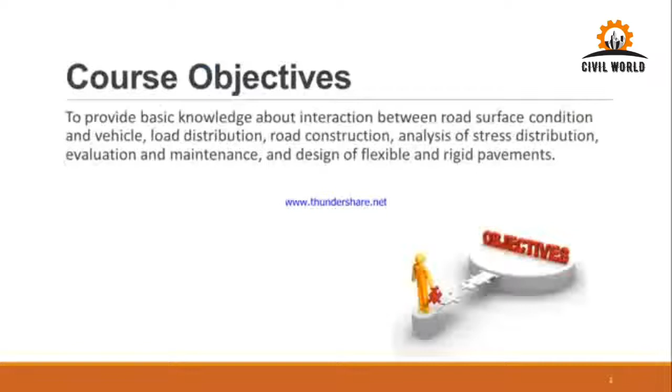These are course objectives: to provide basic knowledge about interaction between road surface condition and vehicle, load distribution, road construction, analysis of stress distribution, evaluation and maintenance, and design of flexible and rigid pavement.

Here in the current subject, first of all, we will focus on the interaction between road surface condition and accident risk, or road surface condition and safety of your vehicle, because the road surface condition is directly linked with the safety of your vehicle. For example, the frictional force or skid resistance on the road surface assures the safety of your vehicle, and the skid resistance on the road surface is the only thing which stabilizes the motion of your car and lets you play with your car during the journey.

For example, you might have observed that when there is oil content or mud or ice on the road surface, there is no skid resistance, because the frictional force or skid resistance is produced due to the friction between the tire and road surface. When the tire and road come in contact with each other, the friction becomes the source of frictional force, and the frictional force stabilizes the motion of your car and enables you even to play with your car during motion.

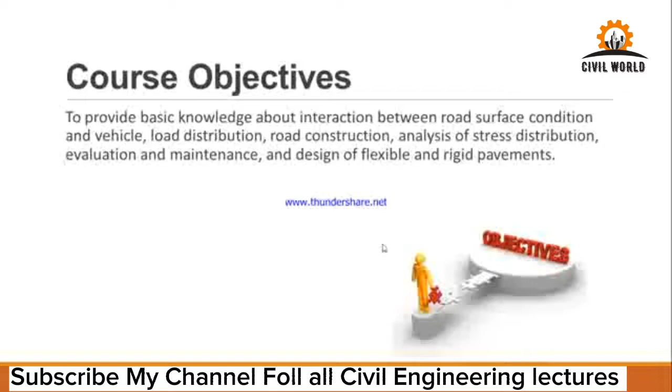And I have told the students that attention and presence are very essential in order to learn the current subject and then put this knowledge into meaningful actions for the betterment of society. So hopefully all of you will be present and on time during the mid session.

So in today's topic we are planning to study road intersections. An intersection, also commonly known as a crossroad, is any place where two or more roads intersect or meet each other. It may be at the same grade or a different grade, I mean at the same height or a different height. An intersection may be signalized or non-signalized, and may or may not have a roundabout.

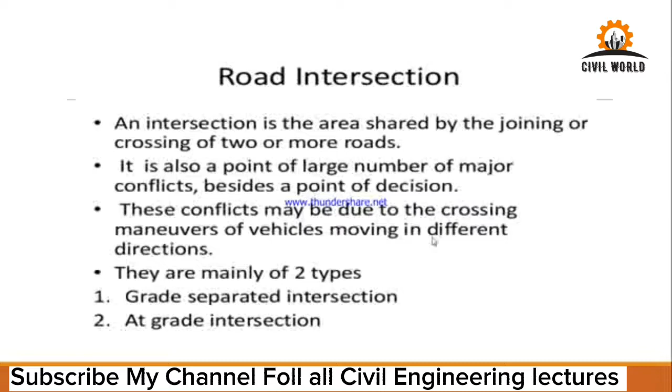These are basically intersections where the two roads meet at a different grade, or where the two roads cross each other at different grades, and usually some small roads called ramps are provided at the side, connecting both the facilities, in order to transfer traffic from one facility to another facility.

An at-grade intersection is a junction where two or more roads or streets meet or cross at the same level. They are classified as unchannelized intersection, channelized intersection and rotary intersection. So first of all, we will talk about the unchannelized intersection.

So first of all, I'll talk about channelized intersection. These are those intersections where the vehicles approaching the intersection are directed to definite paths by islands, markings, etc. And this method of control is called channelization. But if no channelization is provided, the driver will have less tendency to reduce the speed while entering the intersection from the carriageway.

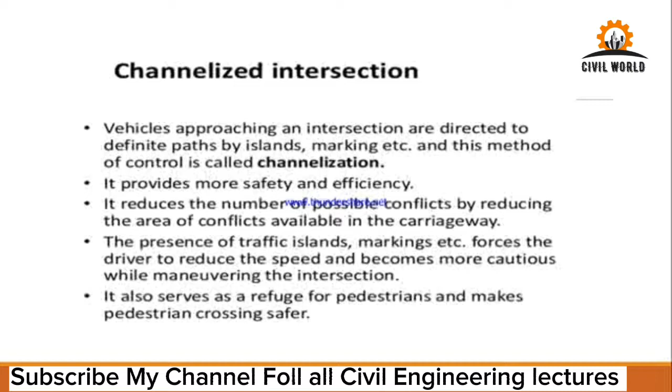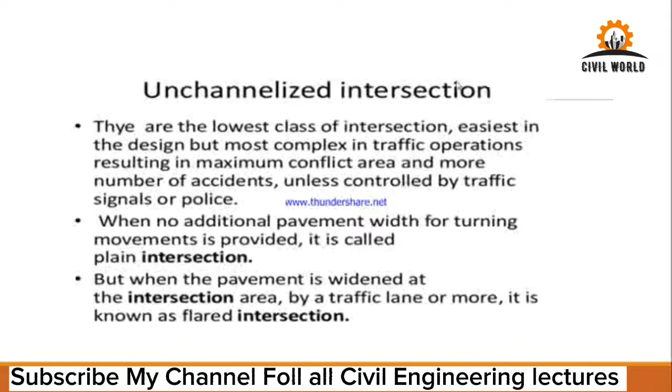The driver basically violates the law and thus tries to use any part of the intersection, and sometimes this habit may become a major cause of accidents, and that's why these unchannelized intersections are the main sources of traffic accidents. Channelized intersections are much better compared to unchannelized intersections to reduce traffic accidents.

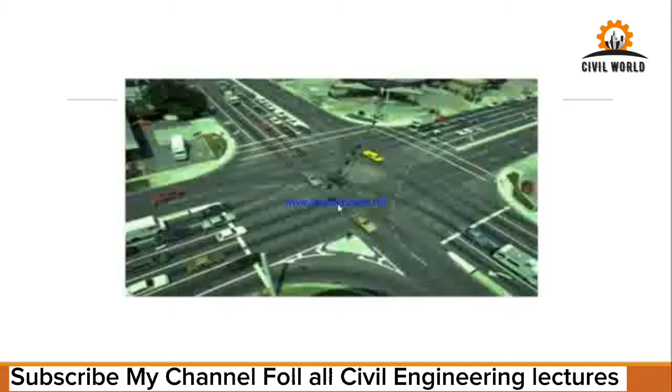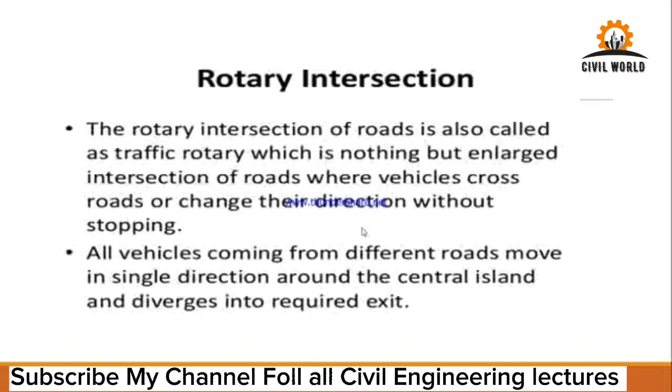And around the central island a roundabout, a rotary intersection, has been provided, which allows only clockwise movement of the vehicles. The vehicle has to move in a clockwise direction until it reaches its destination.

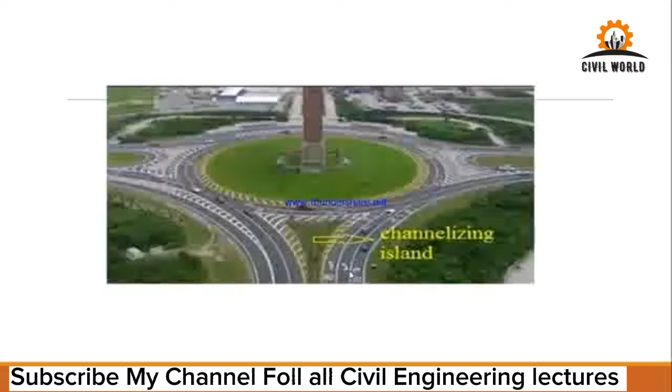And this type of intersection, called the rotary intersection, is very effective in transportation systems to reduce traffic accidents. These are grade separated intersections. These are intersections at which the vehicles cross at different levels.

Here I have already told you that the different facilities basically cross each other at different heights, at different levels, and usually small roads, also called ramps, are provided to link the various facilities, particularly to transfer traffic from one facility to another. They cause less hazard and delay than at-grade intersections.

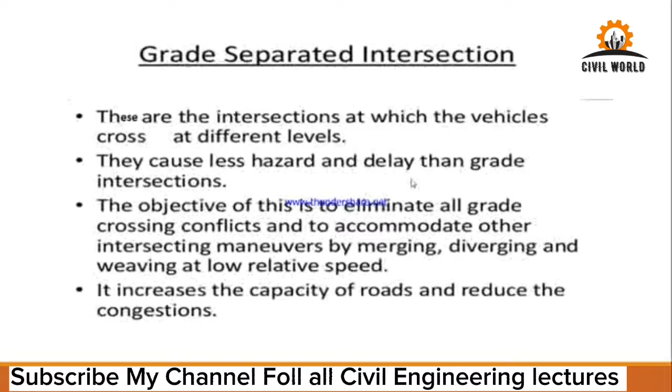The objective is to eliminate all grade crossing conflicts and to accommodate other intersecting maneuvers by merging, diverging, and weaving at low relative speed. It increases the capacity of the road and reduces congestion. Because there is only one-way traffic, there is no congestion or traffic jamming, because the traffic moves only in one direction.

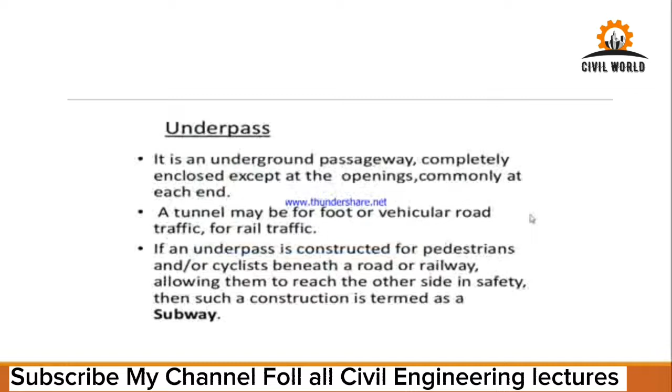Overpass, also known as flyover, is a bridge, road, railway, or similar structure that crosses over another road or railway. A pedestrian overpass allows pedestrians safe crossing over a busy road without impacting traffic. And railway overpasses are used to replace at-grade crossings as a safer alternative.

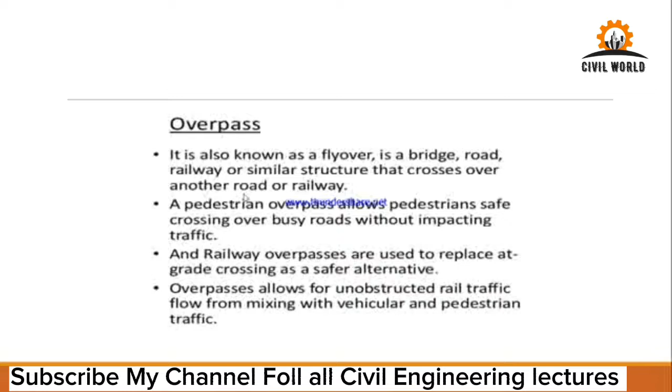Here you can see this is basically an overpass where both the facilities, one above and the other beneath, cross each other but at different levels.

So thank you very much, and we will be studying all these types of intersections in much detail during